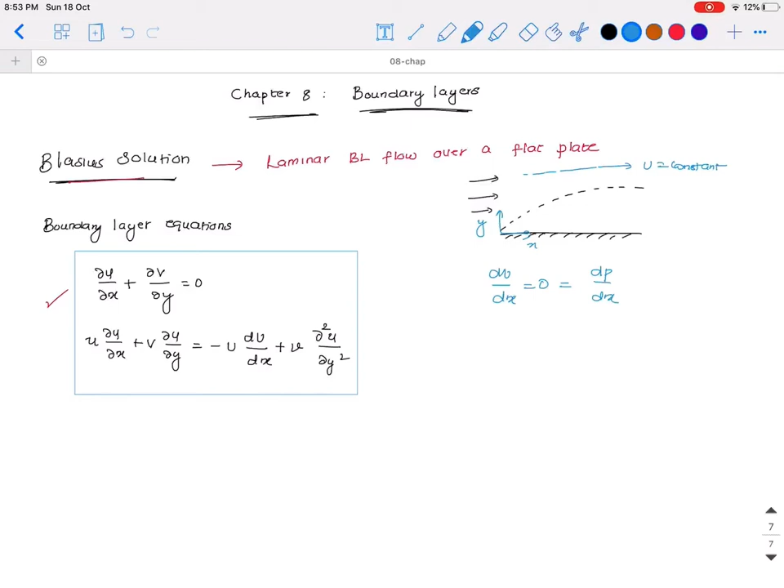From Bernoulli's equation you can verify that the pressure gradient is also 0 for a flat plate, so this term goes to zero and the boundary layer equations are further simplified. But the point to see here is that even after these simplifications, exact solutions are not possible.

Blasius used a very clever change of variable technique to reduce the system of partial differential equations given here as the boundary layer equation into an ordinary differential equation. He converted the two equations, which are partial differential equations, into a single ordinary differential equation.

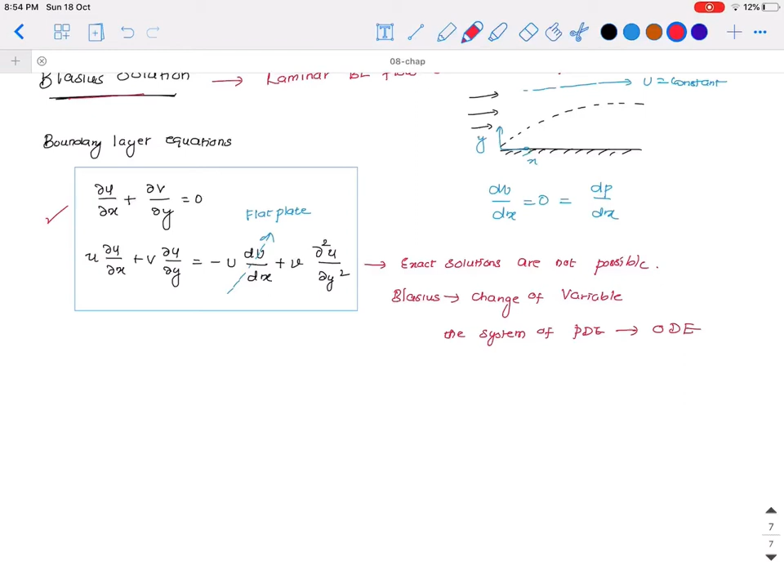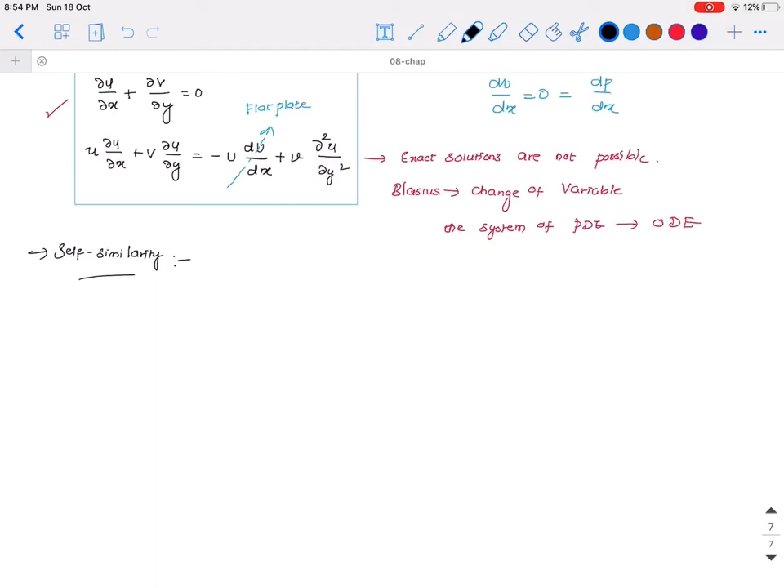Details of this derivation are beyond the scope of the present course, so we will only outline the fundamental idea of Blasius in this lecture. Before we move on to the exact details of what Blasius has done, we need to discuss a very important concept called self-similarity.

By self-similarity what we mean is that if an unknown is a function of two independent variables - for example, velocity within a boundary layer, which is a function of x and y -

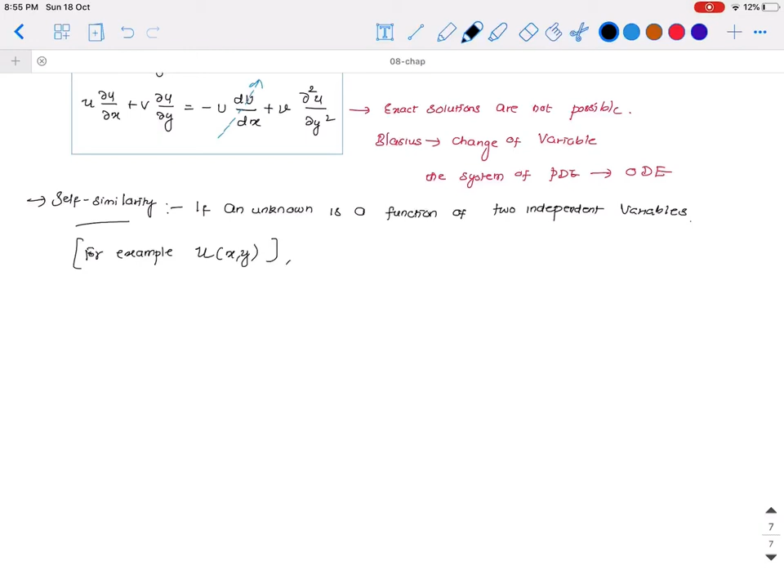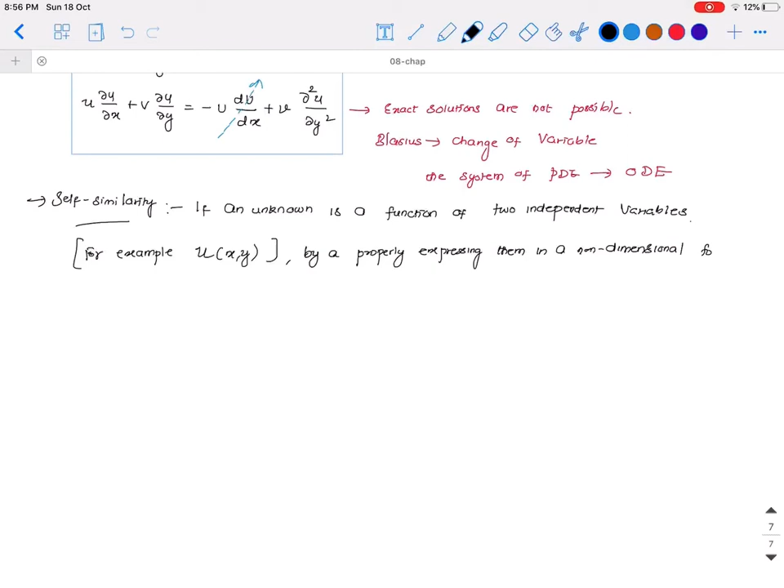if this unknown, like velocity, is a function of two independent variables, by properly choosing, or expressing them in a non-dimensional form, then we can eliminate the explicit spatial dependency of one variable.

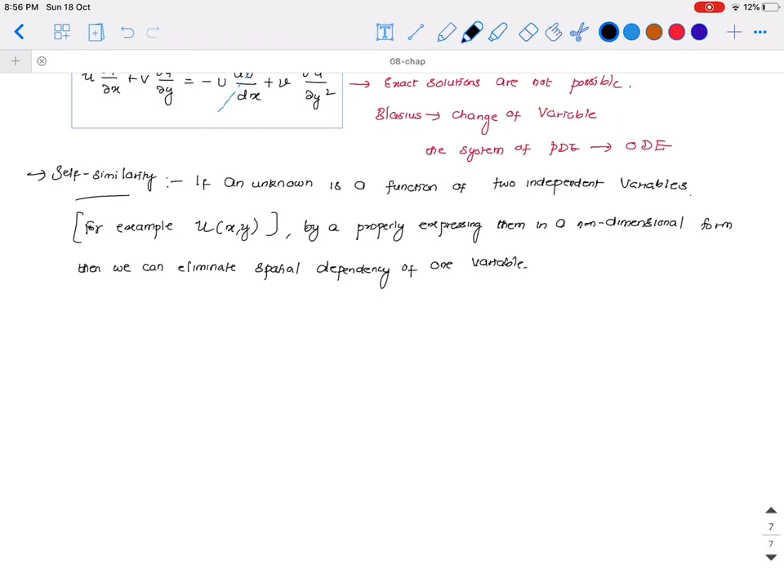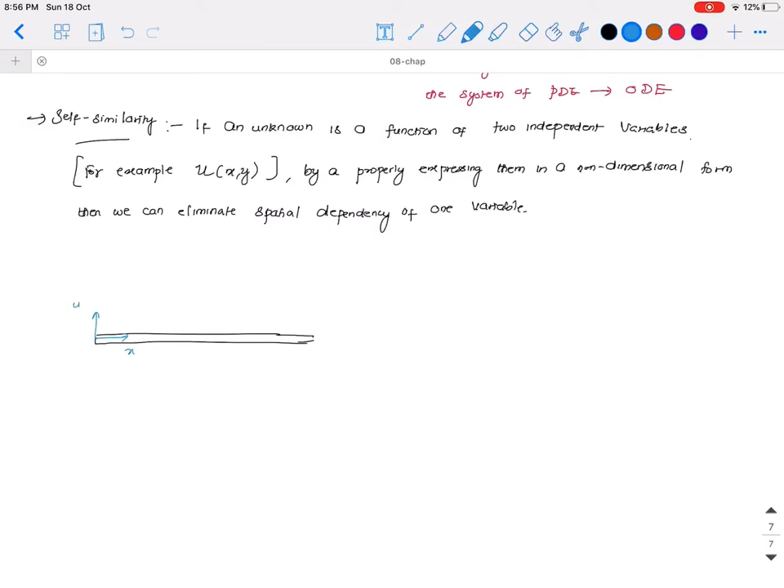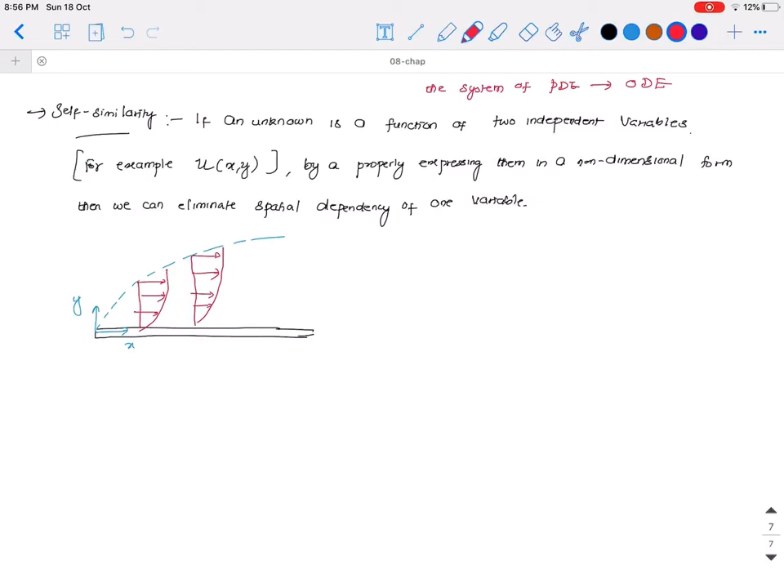This might be confusing now, so let me present an example. Let us again take the example of flow over a flat plate, with x and y axes, and this is the boundary layer edge. If I draw the velocity profile here, it looks like that, and at a different location it looks like here, and at another location it's like this. Let us say this is x equal to x1, this is x2, and this is x3.

So you can see from here that the velocity u is a function of both x and y - when I move along x, the velocity changes, and when I move along y, it again changes in magnitude. So it's a function of both x and y. This is in the dimensional form.

By self-similarity, what we mean is that if we express this in a proper non-dimensional form, instead of y, I'm going to write y by delta of x, where delta is the thickness of the boundary layer. As you know, this is a function of x, because as we move along x, the boundary layer thickness is increasing. If we plot this versus u by u infinity, which is the free stream velocity, all these profiles will fall into a single curve.

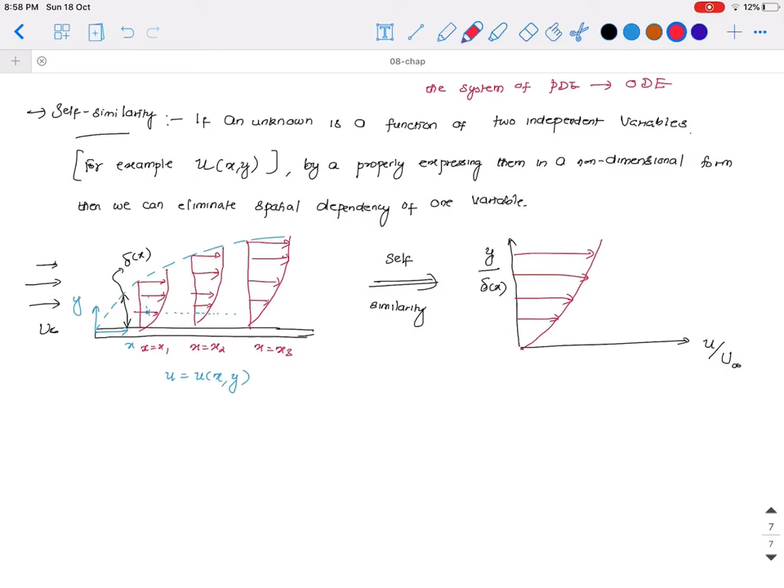It doesn't matter whether you are plotting the velocity profile at x equal to x1, x2, or x3 - we will get a single velocity profile. All these curves, or velocity profiles at any location, all collapse into a single curve.

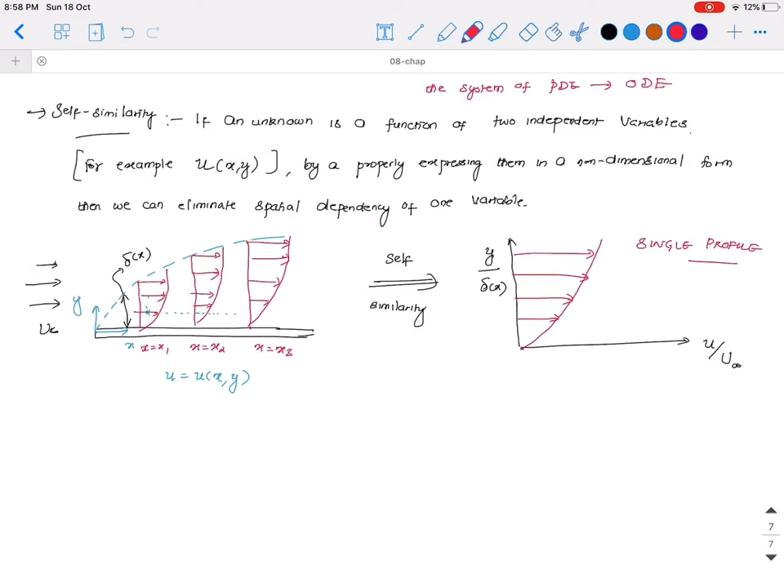So in non-dimensional form, since u is a function of x and y, here u by u infinity is a function of eta, where eta is called the self-similarity variable, which is equal to y by delta of x. You can see that here there are two independent variables, but here there is only one, which is the self-similarity variable.

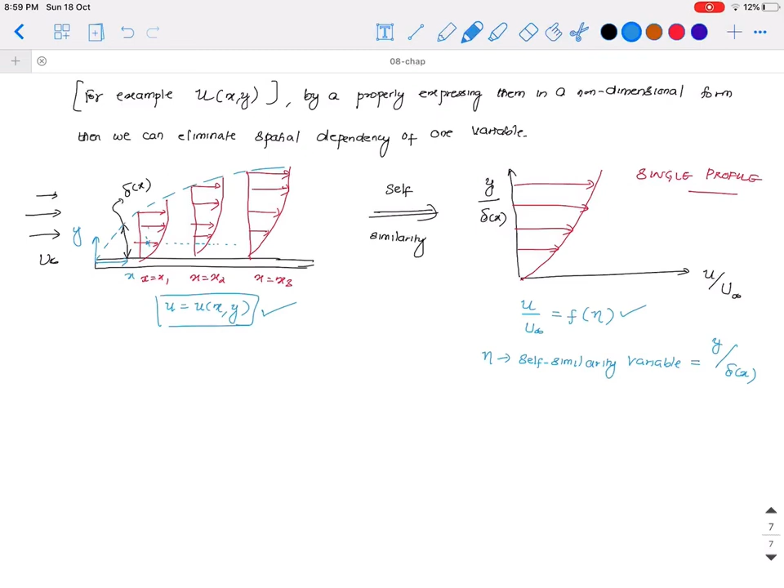Self-similarity does not occur for all fluid flows - only for some very specific set of fluid flow problems for which we can use this self-similarity concept. It is not a very general one, but it is applicable for laminar flow over a flat plate.

Without going too much into detail, what Blasius did was introduce a stream function. I hope you know what a stream function is. The existence of a stream function guarantees automatic satisfaction of mass conservation, so it's some function of eta which is unknown. Since we're now talking about stream function, we don't have to consider the mass conservation equation separately.

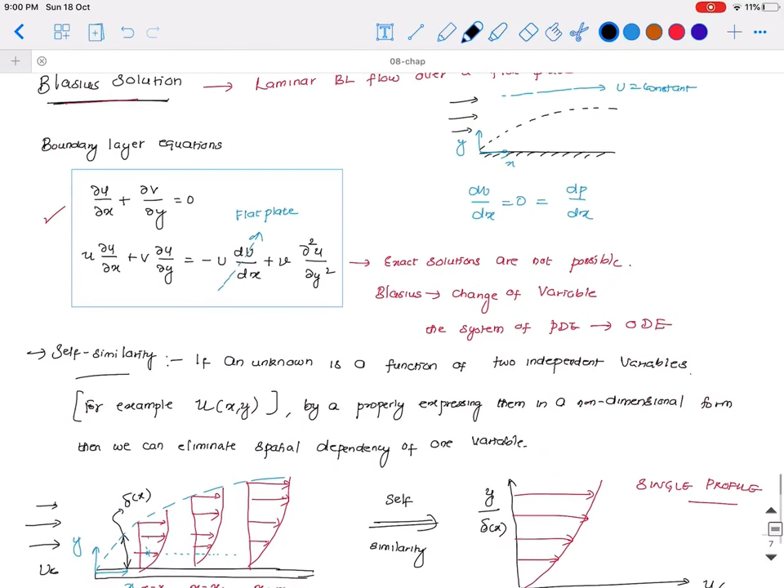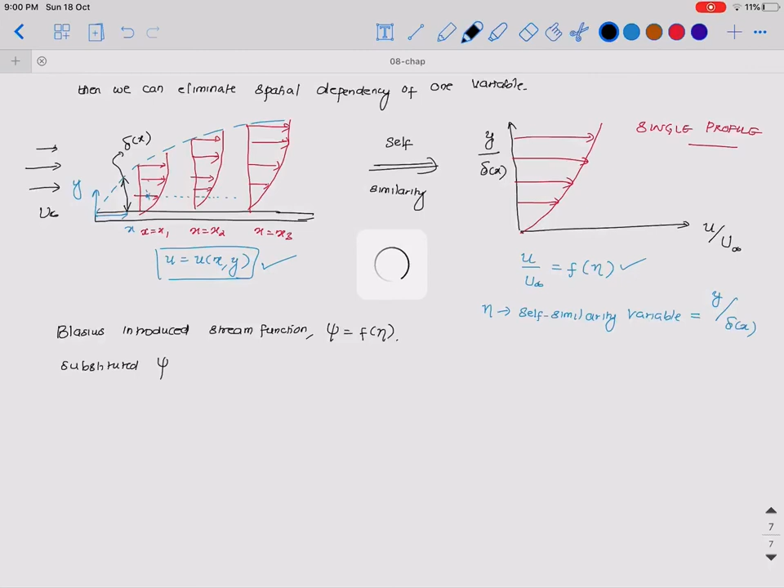So he substituted this unknown function psi into the x momentum equation, to get the following equation: 2f triple dash plus f double dash times f is 0.

We started off with a system of partial differential equations. We reduced it to a third order ordinary differential equation. This is the Blasius equation.

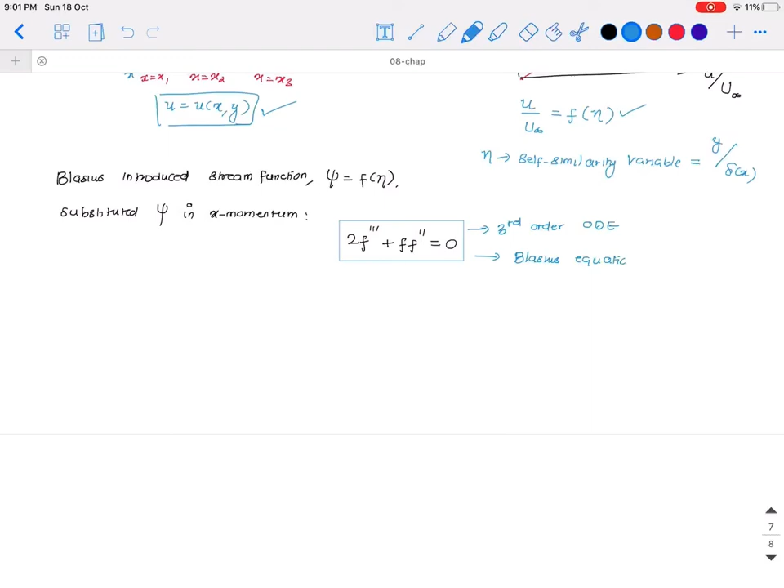So even after such simplification, we started with Navier-Stokes, we got the boundary layer equations, then we considered flat plate flow, a boundary layer flow on a flat plate, and we got the Blasius equation, which is a simple third order ODE.

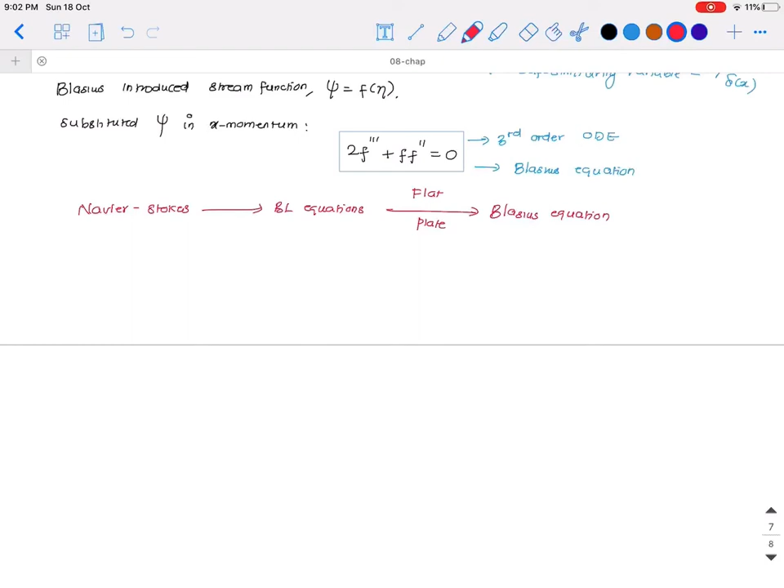Even after such simplifications, Blasius's equation is not possible to solve analytically. Even this third order ordinary differential equation, which looks simple, cannot be solved analytically.

By the way, when we say f dash, we are talking about the derivative. f dash is the first derivative, f double dash is the second derivative, and f triple dash is the third derivative of f with respect to eta. So f dash is df by d eta, as mentioned there.

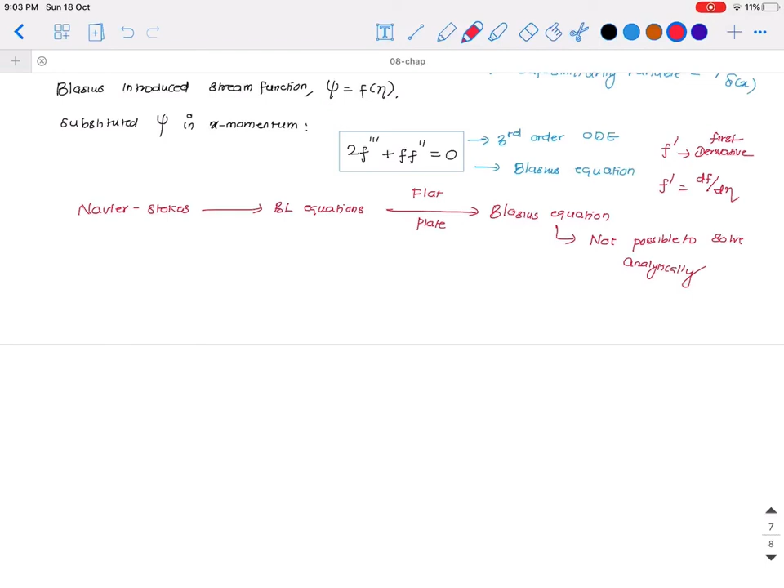So what Blasius did was use numerical methods to get the solution for this equation. Next semester you'll have a course on numerical analysis where you'll learn more about how to solve ordinary differential equations using numerical methods, so I will not get into the details. Blasius used numerical methods to solve this equation.

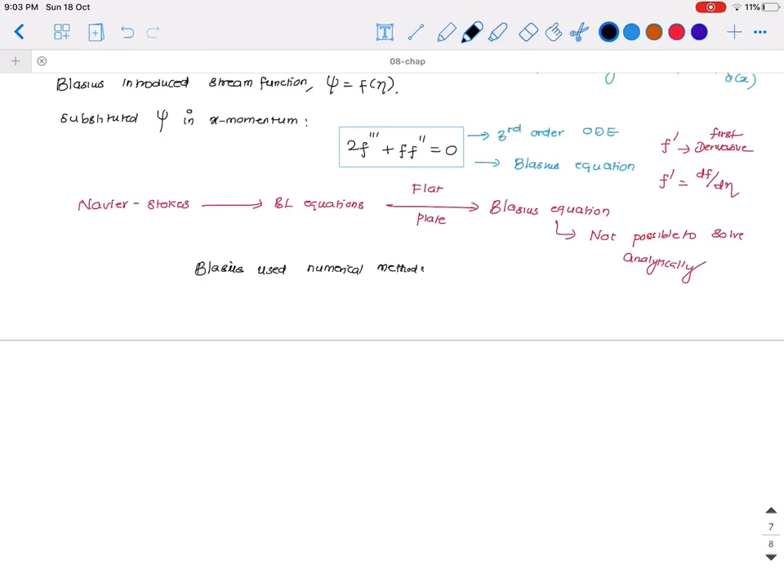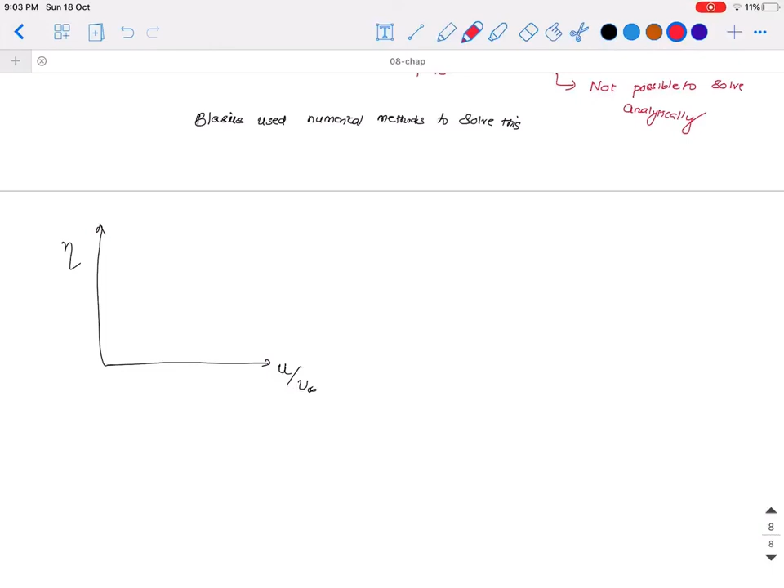He then obtained the following velocity profile. If you plot the non-dimensional form with respect to eta, you get the velocity profile. It's such that u by u infinity is 0.99 at eta equals 5.

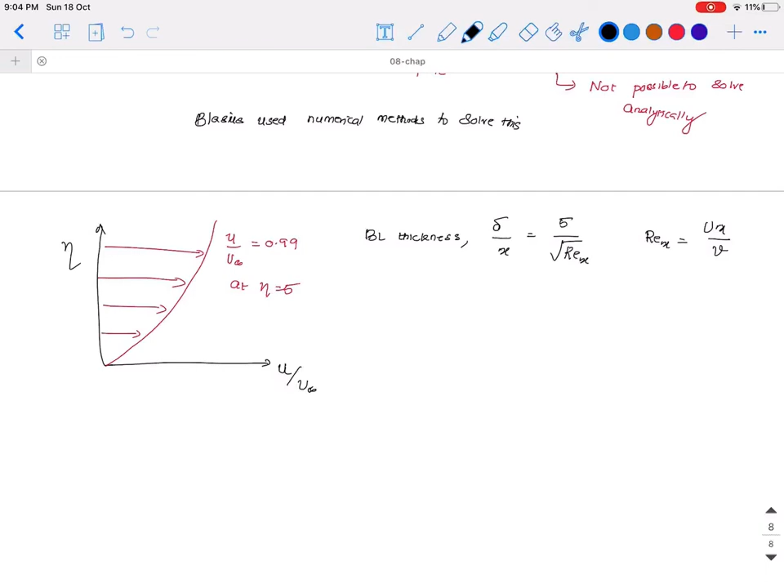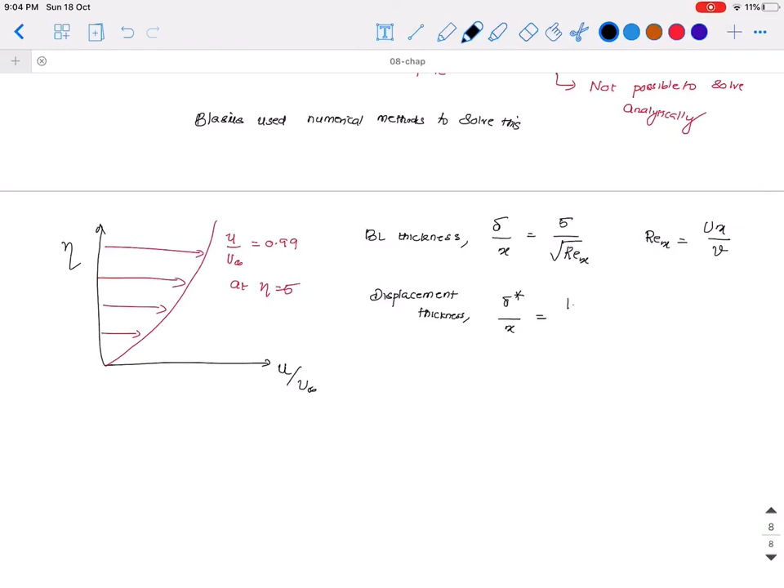He also obtained the boundary layer thickness, which is delta by x equals 5 divided by the square root of Re_x, where the Reynolds number with respect to x means ux by nu, using the length scale which is the distance from the leading edge of the plate. Then the displacement thickness, delta star by x, and the momentum thickness, theta by x.

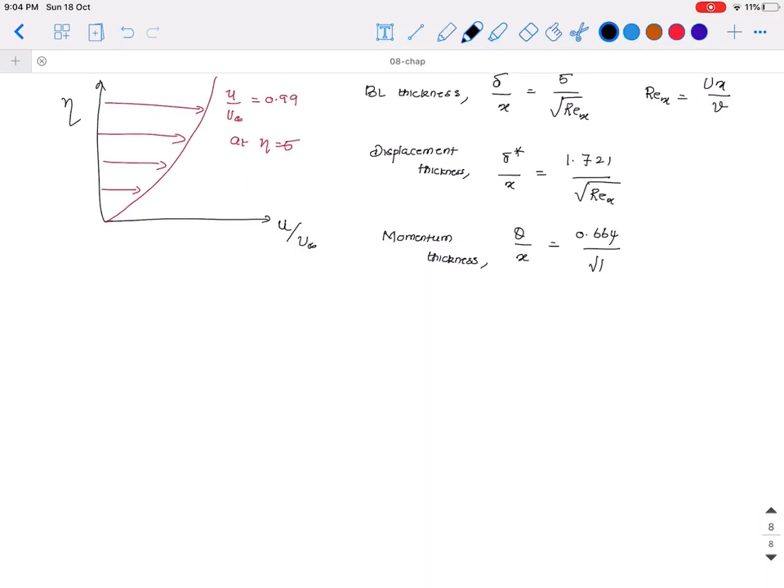In addition to this, he obtained an expression for wall shear stress: tau_w equals 0.332 U to the power 3/2 times the square root of rho mu over x, where mu is the dynamic viscosity.

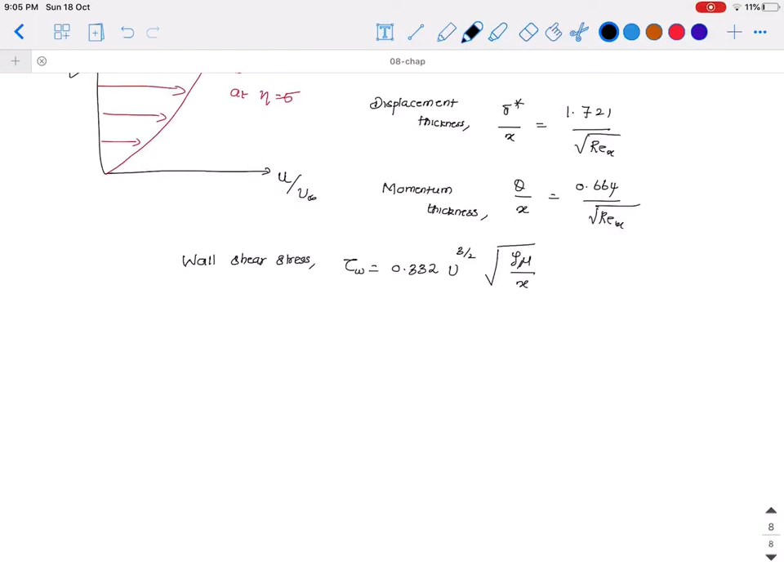So if we plot wall shear stress with respect to distance from the leading edge of the plate, we see that it is a decreasing function. Wall shear is proportional to 1 over the square root of x, so as x increases, the wall shear decreases. Can you guess why is it so?